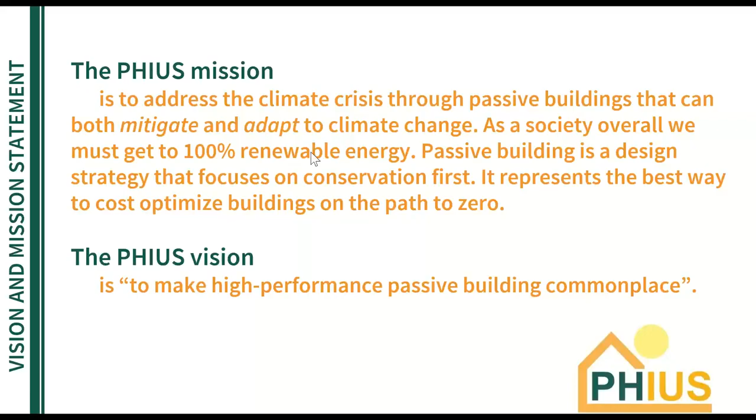Okay, so a couple key passive building principles. Starting on the left, we have thermal control, right? So this is, again, a direct analogy with that thermos. We have continuous insulation all the way around the building. That includes the windows, right? So obviously, I think we can all understand you can add insulation to our walls, our roof, our slab, but we can also upgrade the energy performance of our windows. So actually tracing that entire section perimeter of the building and making sure we have continuous insulation all the way around that building is really key.

Next, we have radiation control. So when we orient our buildings properly, or even in a retrofit where we don't have much say over how we orient our building, we do get solar heat gain on our buildings, right? So that's free heat. And when we can tune our buildings properly to take advantage of that free heat in the winter when we want it, and then block that in the summer when we don't want it, that will help us control the amount of heat that's making its way into the building from the sun and outside conditions.

It also helps us reduce our mechanical sizes. The more free heat we can get from the sun in the winter, the less heat we need to supply into the building through our mechanical systems.

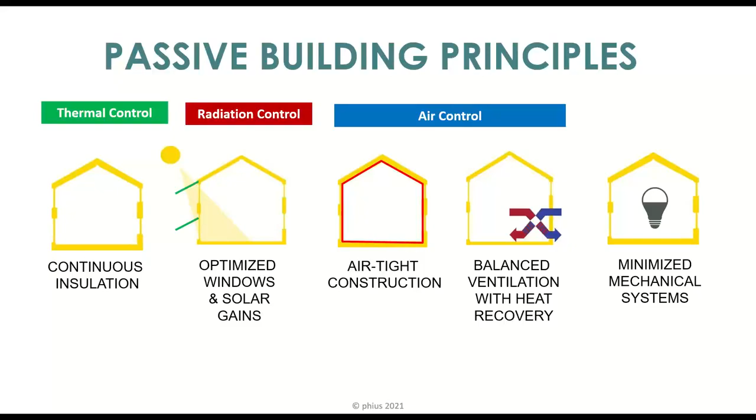All of these aspects result in a minimized mechanical system. Going back to the very beginning of the passive house concept, it was all about the question of what is the smallest heating and cooling system we can put into our building. Rather than building our envelope first and then determining how big our mechanical system needs to be, like we do now, we say: what's the smallest system we can have, and then let's engineer our building envelope to work with that small system.

So we do a building energy balance calculation, and this is the best way to understand what that calculation is. This is something we can do shorthand, through PHPP—the passive house planning package—or through an energy model called WUFI. WUFI is the backbone for PHIUS certification, and essentially it's an energy model that looks at the whole building, looking at our loss buckets on one side and our gain buckets on the other.

On our loss buckets, we have transmission loss—how we lose heat through our building envelope—and how we lose heat through our ventilation systems. We need to get stale air out of our homes, and therefore we have to bring fresh air in, and there's a huge amount of heat loss associated with that. So those are our two heat loss buckets.

On the other side, we have two gain buckets, or what I like to call free heat: our solar heat gains, which we already addressed, and our internal heat gains. Depending on what we're doing in the building, our bodies and metabolic processes actually give off heat. So what passive house can do is harness that free heat from the sun, from our bodies, from our computers and lights—everything that produces heat inside our building—and use that to heat our building rather than relying on our mechanical systems.

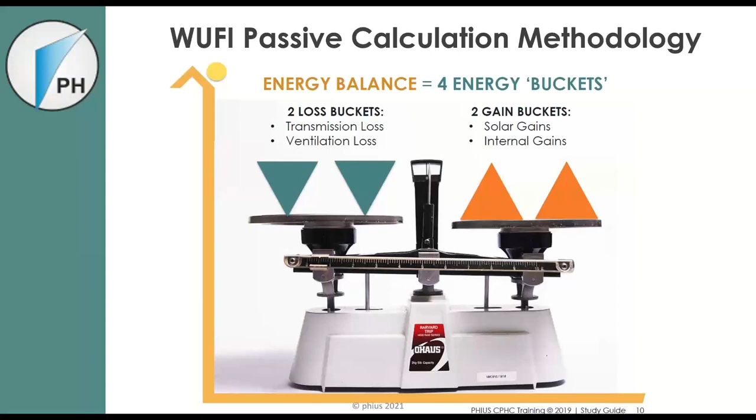So the Passive House methodology is about calculating our energy losses in order to determine how much heat we have to add back into our building, or cooling. I tend to talk about heat a little bit more because we're in the Northeast, a heating dominated climate, but the same methodology can apply to Arizona, Texas, etc., more cooling dominated climates.

The key portion of how we determine these targets is not just about energy conservation. That's obviously a key part, but if you've worked on a high performance project before, there's really no limit as far as how much insulation you can add, or how tight you can make your building. You can kind of keep going and going and going.

But what PHIUS is trying to do, using a piece of software by NREL called BEopt, is actually find the sweet spot for investment in energy savings. So not only are we focusing on conservation, but we're focusing on conservation in a cost optimized manner.

So if we look at this chart on the top, this is a screenshot from BEopt. We can see at the bottom along the x-axis, what is our source energy savings, how much energy are we saving throughout the year. And then we have energy related costs, essentially dollars per year.

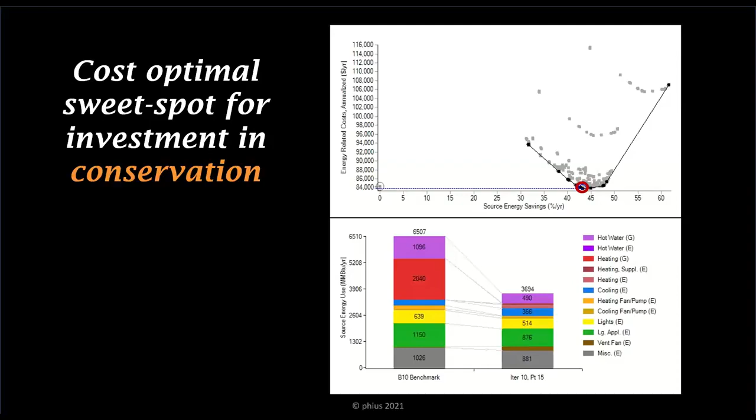Once we go past that percentage, then we're actually starting to spend a little bit more money on energy costs throughout the year, and actually spending too much money on our conservation methods. So this is for one sample project, but this is the base methodology that we apply to all of our certified buildings.

Okay, so why do we build to the standard? What is the motivation to do that? I think some of these concepts are already becoming pretty evident based on how I'm speaking about it and what the goal of PHIUS is, but I think we can actually break this down a little bit more in detail.

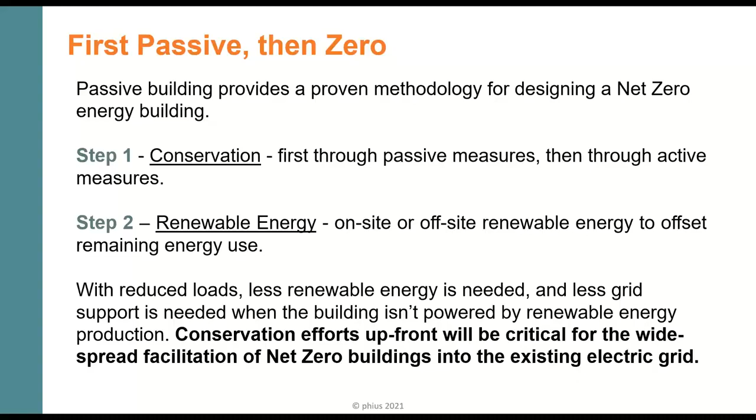The current solution for our climate change goals is renewable energy. Any major leader in climate change is looking specifically toward photovoltaics to address these goals. But the amount of square footage needed to meet those goals is extraordinary. So we need to make sure we're using conservation methods in our buildings, which constitute about 40% of our total energy consumption as a country. If we can take that 40% and greatly reduce it through conservation, we can actually reduce the amount of square footage needed for renewable energy.

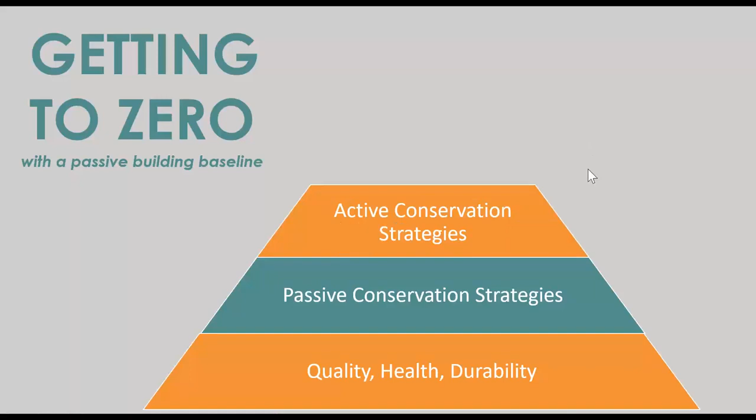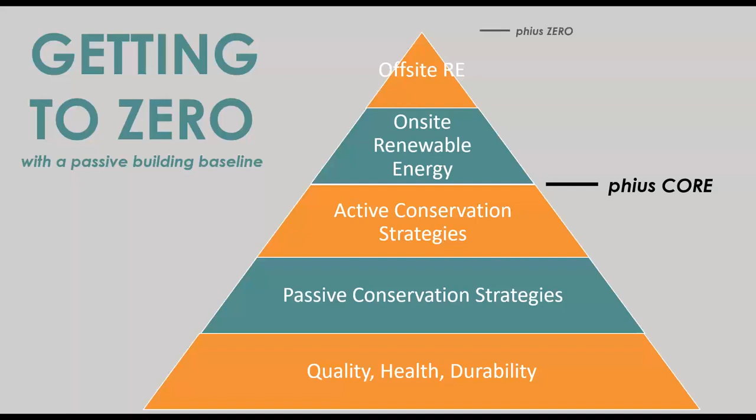Getting to zero with a passive building baseline: at the core of this track is the quality, health, and durability of our buildings. We don't talk about this enough. When making passive house buildings, we make them high quality, with the healthiest air quality possible, and they're durable. Then we add our passive conservation strategies, and on top of that our active conservation strategies. That's how we meet PHIUS Core. From there, we can add on-site renewable energy, and if needed, off-site renewable energy as well. This is what gets us to PHIUS Zero certification.

So how does a building actually become certified? We already spoke about the different characteristics of a certified building and why we want to do this. Now, what is the process of going through and certifying our buildings? First we need to talk about the different professionals that will help us certify our buildings, starting with building our project team.

You may be familiar with what's known as a CPHC, a Certified Passive House Consultant. This is the designation PHIUS gives to its trained professionals, and it's a required role for certifying a building. On the design side, we have a CPHC involved who is familiar with the certification process. They provide the energy model to ensure we're looking at the proper energy balance of the building, and ideally they're as integrated into the design process as possible so we can achieve cost-optimized targets. The CPHC completes the energy model and assures the project meets all requirements during the design phase. That's the core of the CPHC's role in the certification process.

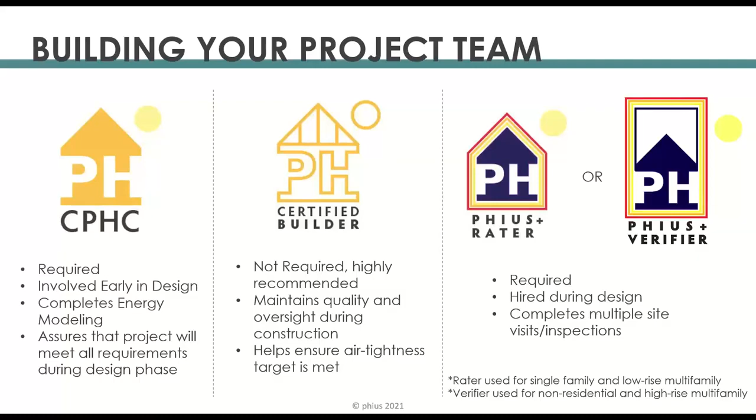As I said, there are two parts to PHIUS certification. First, we have the pre-certification, which is the role of the CPHC. The CPHC will submit that work to PHIUS, and PHIUS will check all of that work.

As a CPHC, I'm really grateful for this process, because we're dealing with a lot of nuanced pieces of information, and it's great to have an extra eye on the design process just to make sure we're hitting all the criteria. It's reviewed by PHIUS, and then there's a slight back and forth after the review where we have comments that clarify all of the design elements.

And then we have final certification. So we go through the design process, we speak with PHIUS, we get pre-certified. When the building is pre-certified, we're essentially cleared to build that building, and as long as we build exactly to the drawings and specifications, final certification should be no problem.

Final certification is largely made up of on-site quality assurance and testing. We have an inspection completed by the PHIUS rater, who is a third party. They are isolated from the CPHC ideally so there's no conflict of interest. They will review all the documents completed by PHIUS and the CPHC, and then true up that final energy model to match the as-built.

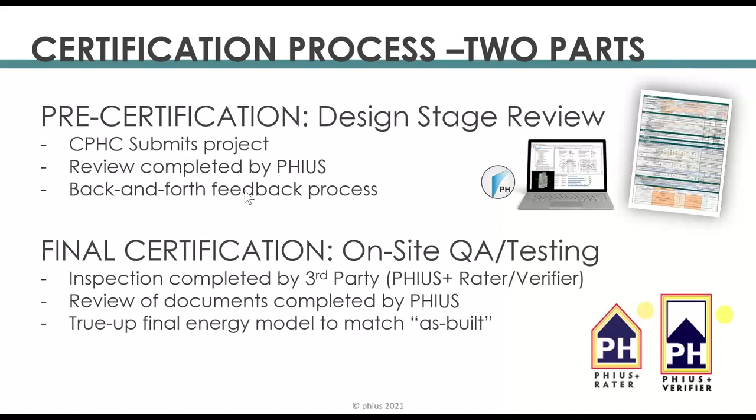Again, the whole building energy performance is part of the pre-certification. This is where the backbone is really the WUFI Passive modeling software. We're seeing that on the bottom left here, where we actually build out our building. We can take a look at the climate, so we import climate data into our building, and then we have, it's kind of hard to see here, but very live updating performance of our particular building.

You can also see these five green dots here. Those are really nice green check marks. So when we have all those green check marks, we're good to go. We can certify this building.

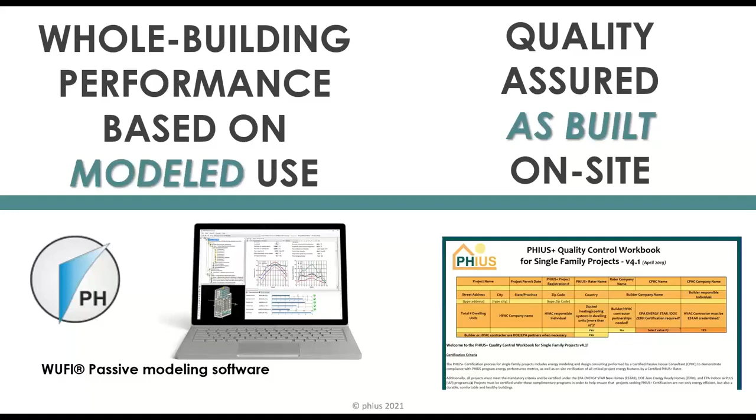And the basis of the QA/QC, the on-site process for final certification, would be a PHIUS Plus quality control workbook, essentially an Excel document that the PHIUS Plus rater or verifier will bring on site, and it's checklist based. So we can go on site and just make sure that we're hitting all of those specific targets.

So those specific targets, what exactly are they? First we have space conditioning targets at the very top here. As we can see in the red dash, these are requirements for all PHIUS certifications. Those space conditioning targets can be broken down into our annual heating demand and annual cooling demand—throughout the entire year, how much energy are we going to spend on both heating and cooling. So those are the first two targets.

The second two space conditioning targets are our peak heating load and peak cooling load. Those speak to the worst case scenario. So January, February in Massachusetts, Connecticut, New York, we have the coldest peak temperatures of the year. Are we going to have enough capacity within our mechanical systems to meet those peak targets?

And then the last part of that is the quality assurance and on-site testing, which I already spoke about quite a bit, as well as the air tightness, which the target would be 0.06 CFM per square foot.

Outside of this red dash box is our net source energy target. For PHIUS Core certification, we have a per person fair share source energy target of about 4,200 kilowatt hours per person per year. That's based on all of the people on the planet and the amount of energy we would consume if we were to hit that 1.5 degrees Celsius global warming target. So we have an allowance of how much carbon we can put into the atmosphere within safe limits, and we divide that by all of the people on the planet. That's a fair share energy use target, and that's what's required in PHIUS Core certification.

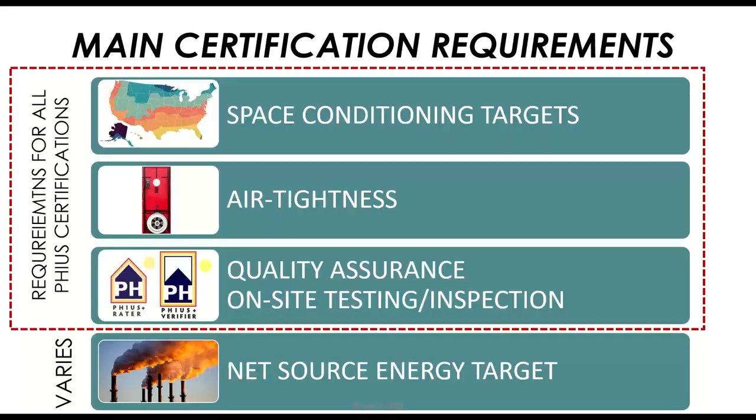In a conventional building, if you have a window seat, in the middle of winter you're not going to want to sit there. That window seat will be cold and uncomfortable, with very cold temperatures on the surface of the glass. Not with a PHIUS building. With a passive house, we can build that window seat, and on the coldest day of the year, the coldest hour of that day, we can sit there with our back against the glass and still be very, very comfortable.

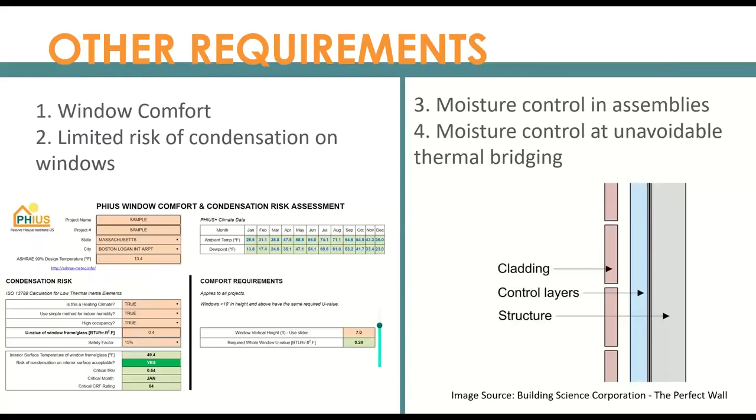The other part of this built into the PHIUS certification is moisture control guidelines, dealing with the durability of our buildings. There are climate-specific moisture control guidelines we must adhere to in order to certify our buildings. That ensures that as relative humidity and temperature fluctuate throughout the year, we never get condensation forming within our walls. Condensation within walls can lead to mold growth, wood rot, and lower R-values in our insulation. So we can do all this work to super insulate and airtight our buildings, but if we get condensation, all of that work is for nothing. Our buildings will fall apart if we don't address those moisture control guidelines.

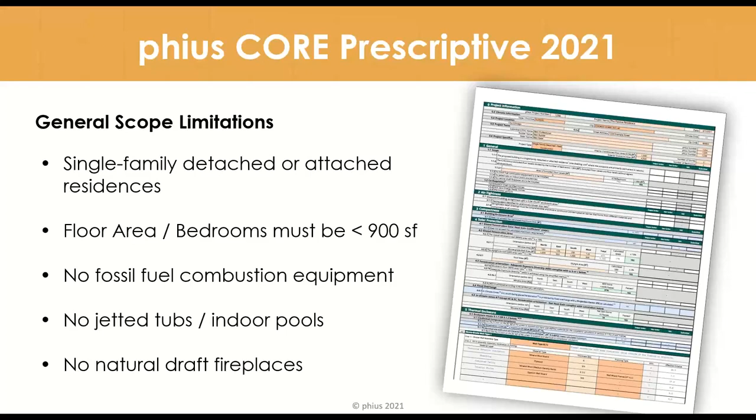The PHIUS prescriptive path is all available on phius.org if you'd like to check that out a little bit more. But the biggest benefit, especially if you guys are interested in becoming CPHCs, is that you can now certify these smaller projects without WUFI energy modeling. So if you're looking at a single family home, you can either use WUFI Passive modeling or the prescriptive path in order to certify your projects.

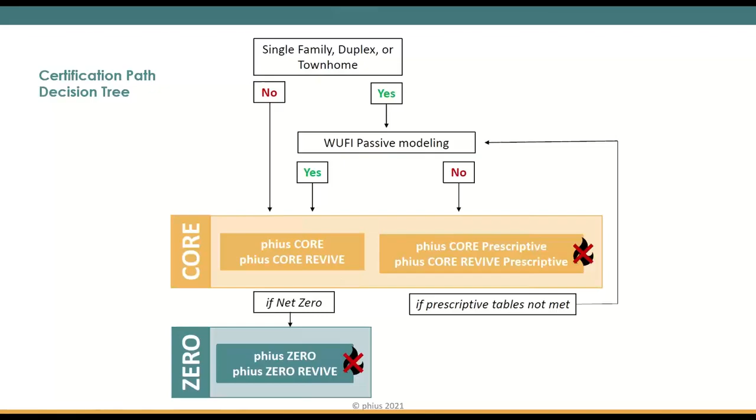If for some reason the prescriptive path does not work out, or your building cannot meet all those requirements, you can then simply go back to the performance path and do the energy model. The energy model gives you a little bit more flexibility to kind of balance things out. You can have lower performing windows by adding more insulation to your wall, etc. Right? So it's all about that building energy balance calculation. And within both of these programs is this DOE high performance staircase, like I had explained earlier.

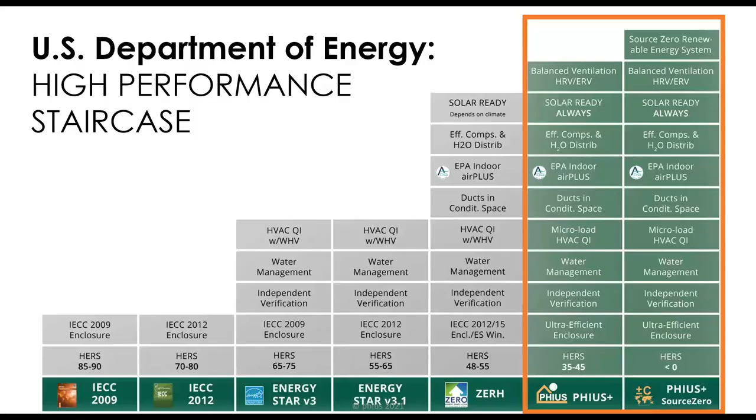Okay. All right, I don't see anything in the chat yet. I'm going to just keep wrapping up. We have just a few more slides and then we can take questions.

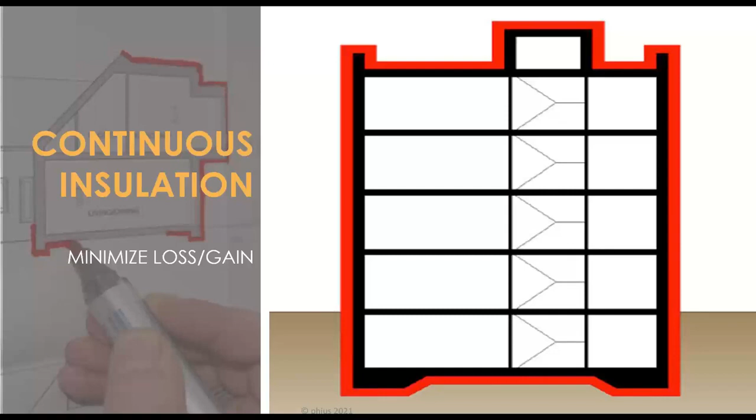So now that you're a bit more familiar with what a passive house is, the elements, and how you become certified, just taking a look briefly at some common design features that you can find within a certified passive house. We have continuous insulation, like we spoke about, that minimizes our losses and gains. We have structural thermal breaks. So especially when we get into larger projects, like what we're seeing here, this is Studio Gang in Chicago, the Aqua Tower. It's not Studio Gang's fault. This was value engineered out of the project in the construction process.

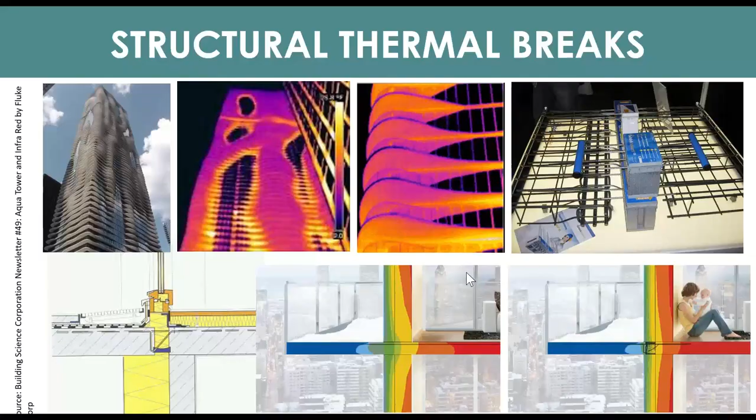But if you look at the infrared images of this project, we have continuous concrete slabs that make their way inside and outside of the glass facade of the building. They were originally designed with structural thermal breaks, isolating the inside from the outside. This was value engineered out of the project. And as we can see in this diagram in the bottom center here, heat will then just leak its way out through the building, through those concrete slabs, through the winter. And then we also lose our cooling throughout the summer. So this is kind of a subcategory within that continuous insulation to make sure we're keeping the heat in our buildings.

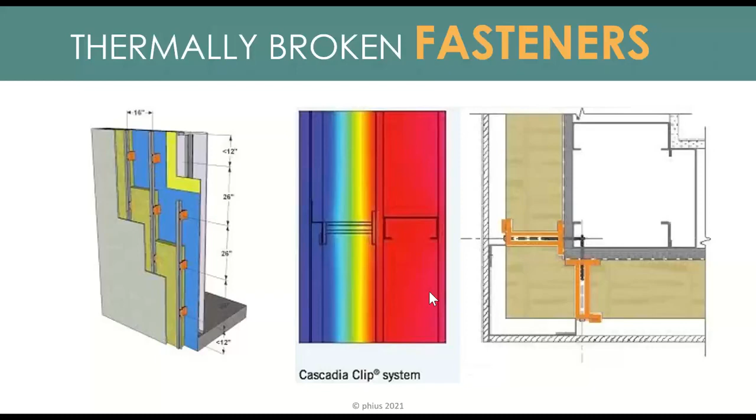Next, we would look at thermally broken fasteners. So when we're attaching things to the outside of our building, how do we use clip systems and different inert materials to actually connect those things and again reduce the thermal bridging that we have within our building envelope. By eliminating these thermal bridges, we also eliminate that condensation risk, because as we have these thermal bridges, the inside surfaces of our building, as we can see in the center here, become cooler. And when they become cooler, they come closer to their dew point temperature. When you get to your dew point temperature, we get condensation. And as I said before, that leads to mold growth and other deterioration of our building.

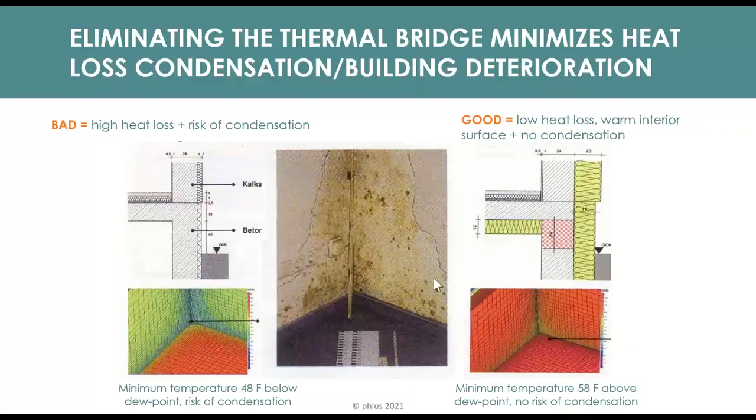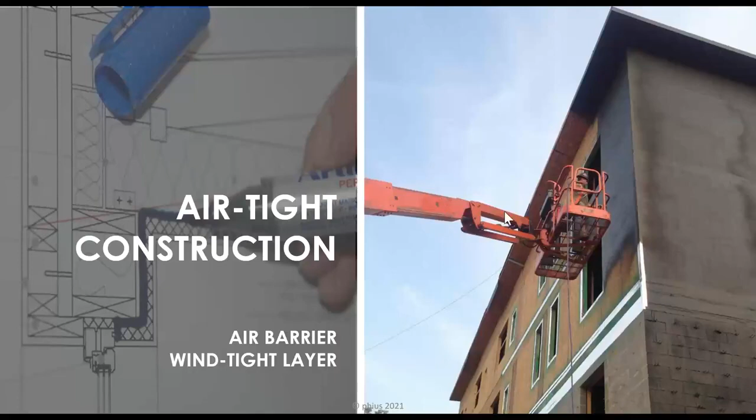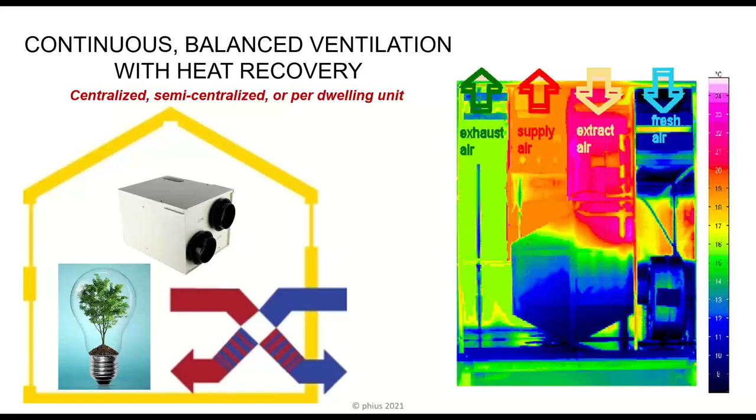We have our airtight barrier or airtight construction. So this can occur at different junctions within our building. As we're seeing here, this is a spray-on application being done for a larger building. We have continuous balanced ventilation with heat recovery. Like I said before, essentially we'll bring in fresh air, precondition that air, and deliver that to all of our living spaces.

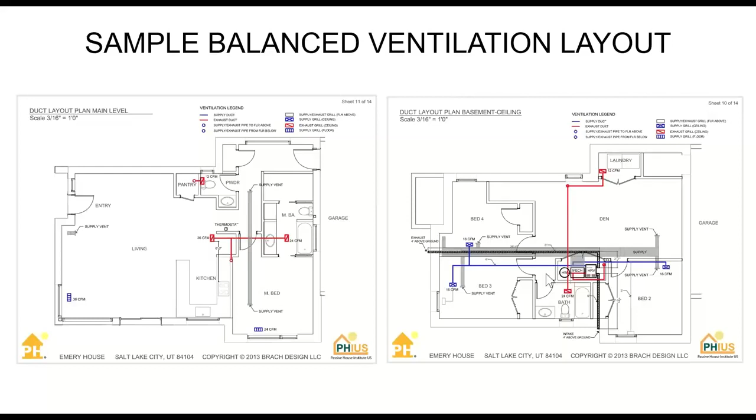We have that balanced ventilation, so we're supplying fresh air to our bedrooms, our living spaces, our kitchens, etc. And then we're exhausting all of that stale air from our kitchens, our bathrooms, our mechanical rooms, our laundry rooms, etc. So wherever we get particulates in the air that we want to remove, especially when we're cooking, I can't stress that enough. We need to get those out of our building as soon as possible and replace that with preconditioned fresh air.

And then lastly, we have our minimized efficient mechanical systems. So we have efficient lighting, ideally 100% high efficiency lighting. Usually that means LED lighting. We have devices such as heat pump hot water heaters, which can be basically 300 to 500% efficient, compared to an electric resistance heater, which is about 100% efficient.

And then we have mini split heat pumps, which are also 300 to 500% efficient when compared to combustion systems, which are about 75 to 80% efficient. When I'm talking efficiency, I'm talking energy in versus energy out. Heat pumps are definitely the way of the future, definitely the way to minimize our energy loss, because we can put in 1 unit of energy and get out 5 units of energy.

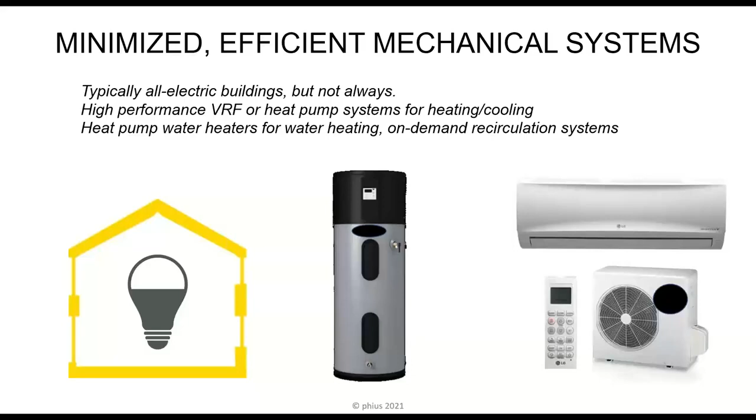So the base of PHIUS certification has been single family for many, many years now. As you guys probably have noticed, multifamily over the past couple of years has really grown exponentially. And then the next frontier is commercial construction here.

And then lastly, to become a PHIUS professional, this is where you need to take advantage of these incentives from Connecticut. Go to phius.org/become a professional. We run online trainings. I'm teaching one this week. Today's my day off. Tomorrow I'm going to start teaching WUFI Passive to a group of about 20. We run them almost every month for the CPHC because there's a very high demand. We're currently running multiple certified builder courses as well, also online, and a PHIUS Plus Rater and Verifier training, which again can all be found at phius.org.